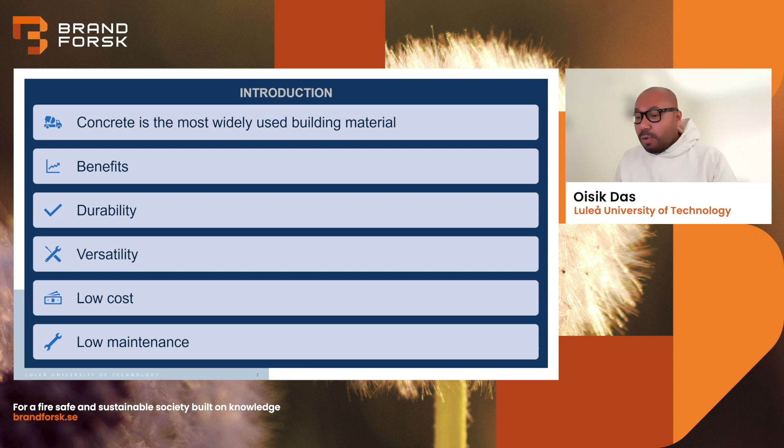So, firstly, concrete. It's one of the most widely used building materials in the whole world. It has many benefits. It's durable, it's quite versatile, it's quite cheap, and it also has low maintenance. So there are a lot of benefits to using concrete, but there are also problems, and these problems are getting bigger and bigger the more we are striving towards sustainable development.

So one of the problems is that it has detrimental effect when it is subjected to fire. It loses strength, and it can also spall. On the other hand, the cement in concrete has very high carbon footprint, and the production of cement has a lot of environmental problems and causes climate change. So these are the two big problems with concrete and cement.

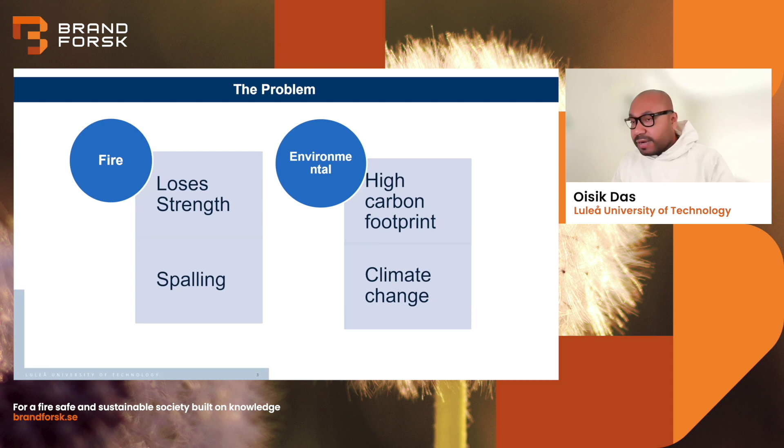So what is the solution we can use? We can use biochar in concrete. So what is biochar? It's the solid product of pyrolysis. Pyro means fire, lysis is to break. So when you heat any organic material or biomass in absence of oxygen at high temperatures, so more than 350 to 950 degrees centigrade, you get a carbonaceous material called biochar.

But why use biochar in concrete? Well, we know that 8% of global emissions caused by humans come from the cement industry. That's quite a lot. And in Sweden, where we are, every person produces about 460 kilograms of food waste. So if we can somehow replace cement with biochar, we can reduce these global emissions, the carbon dioxide emissions.

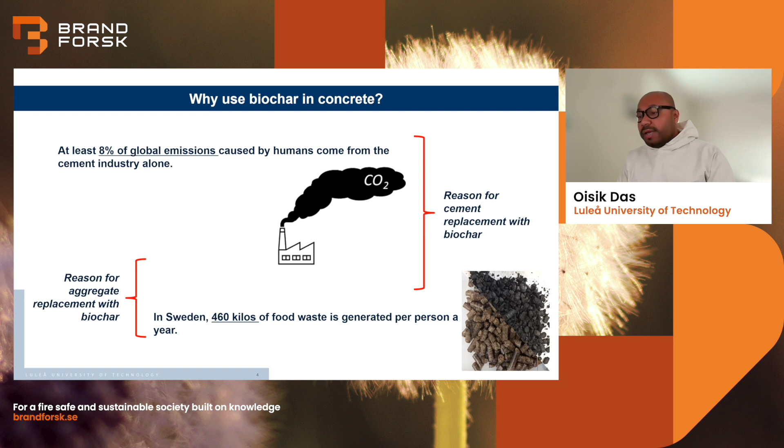And also, if we can convert food waste into biochar, then we are valorizing waste, reducing food waste, and it's more efficient waste management. So how are we using biochar in concrete? By replacement of cement, we can make it more non-polluting and reduce the carbon footprint. And by replacing aggregate, we can upscale or valorize food waste.

So from pyrolysis of biomass waste, we are making the biochar. Here we are using two types of biochar: a fine biochar, small particles, and a coarse biochar, bigger particles. The fine biochar is used to replace cement at 10, 15, and 20 weight percent of the cement. And the coarse particles of biochar are used to replace the fine aggregates at the same weight percentage of the fine aggregate. So the idea was to see if the porous structure of biochar can help water vapor to escape when concrete is exposed to fire.

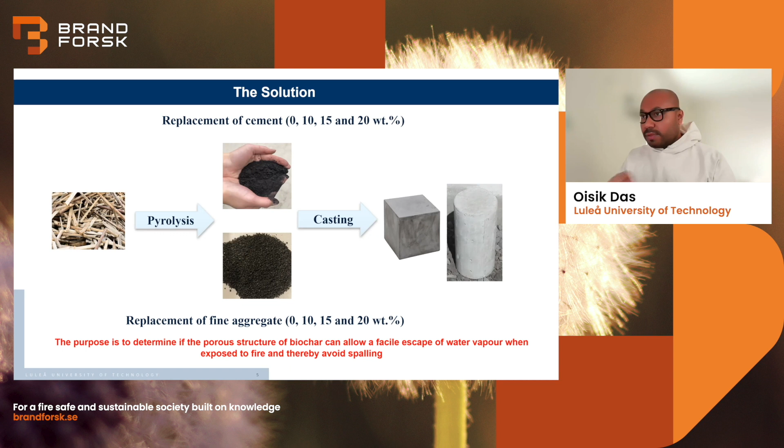So before we start adding biochar to concrete, we have to understand what the properties of biochar are and how these properties will affect the concrete. The first thing we need to understand is the density. We have calculated the biochar's true density or bulk density using an instrument called a pycnometer. Usually the density ranges between 1.5 to 2 grams per centimeter cube.

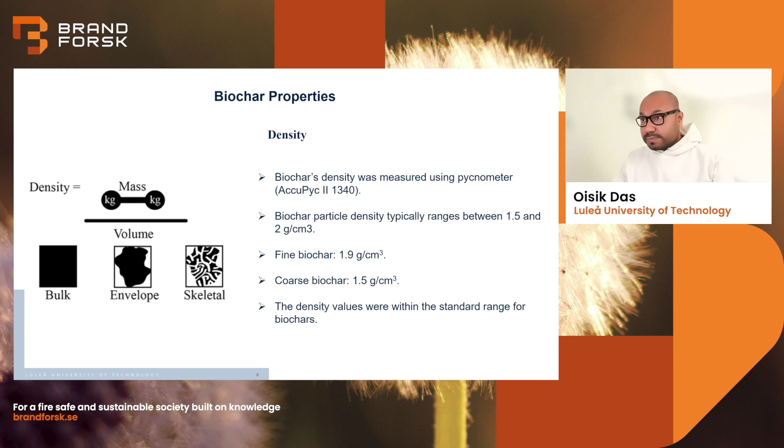Then the particle size distribution: we have used two different methods to determine the particle size distribution of this biochar. The first one is the laser diffraction method. It measures the angular variation in light intensity as a laser beam passes through dispersed biochar samples. And we have also used a software called ImageJ to analyze the photographic images to find out the particle size distribution.

So from the laser diffraction method, we used the fine biochar, and we found out, in graph A, that the particle size ranges from 100 micron to 400 micron. The two dominant particle sizes are 100 micron and 400 micron. And for the coarse biochar, which was made from olive pits, the particle size was estimated using ImageJ software, and it's about 3 millimeters in size, as given in figure B.

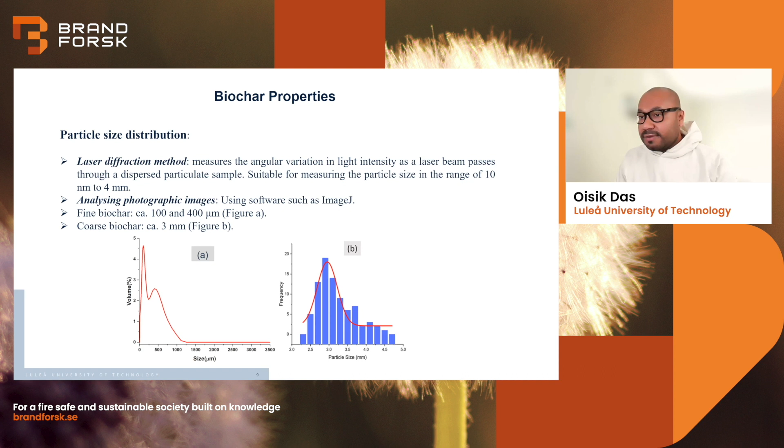Then the water absorption, because when we're adding biochar to concrete, we need water to mix concrete. So we need to understand, when we're adding a new thing in concrete, how much water the new thing will absorb. So we need to find out the water absorption of biochar, and it was done by a tea bag method. It is exactly what it sounds. So we filled up biochar in a tea bag, and then we put it in water, and we measured the weight change at regular time intervals.

Then a very interesting technique. If I ask you, hey, this is a block of concrete or block of wood, can you tell me the mechanical properties? You can easily use an Instron or 3-point bending test to find out their tensile properties, flexural properties. But biochar is a tiny particle. You cannot put it in an Instron and stretch it, or put it in a 3-point bending test to find out its flexural properties. We need a new type of instrument to find out the mechanical properties of tiny particles, and that instrument is called nanoindentation.

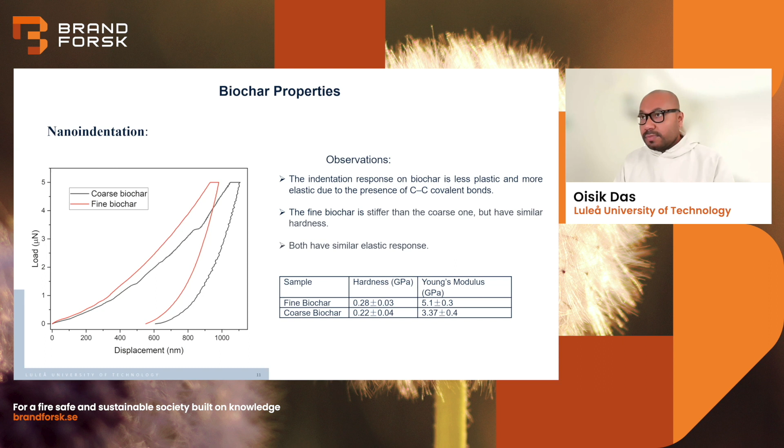Then this is where the fire testing comes. Before we even test the concrete in fire, we have to understand how biochar reacts under fire. So we have used a cone calorimeter. The principle of the cone calorimeter is that almost any material in the whole world, when it burns and consumes 1 kilogram of oxygen, releases about 13 megajoules of energy. And if we can know or calculate the flow rate of oxygen, we can calculate the energy released. And from that, we can get a host of reaction-to-fire information in the cone calorimeter.

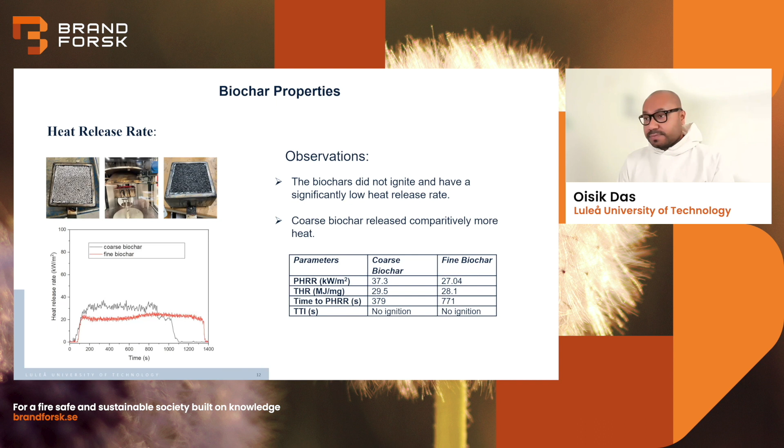Now, my colleague will take over, and she will talk about how we added this biochar in concrete, how we tested the concrete, and what are their fire and mechanical properties after biochar was added to concrete. Rhoda, the floor is yours.

Yes, sure. Thank you. So the recipe for the concrete we prepared for this project is shown on this slide. Two different types of concrete were prepared. The first one is the aggregate replacement concrete, where 10, 15, and 20% of the fine aggregates, which were between the sizes of 0 and 8 millimeters, were replaced with biochar, which had an average size of 2.95 millimeters. And for the cement replacement, 10, 15, and 20% of the cement were replaced with fine biochar, which had a particle size of between 100 and 400 micrometers.

So in all, we prepared 7 batches, including the control sample, and about 30 liters of each batch was prepared. After the concrete preparation, we molded them in cubic and cylindrical molds, and they were cured for 28 days, after which we placed them in a humidity chamber that was set to 23 degrees Celsius and 50% relative humidity.

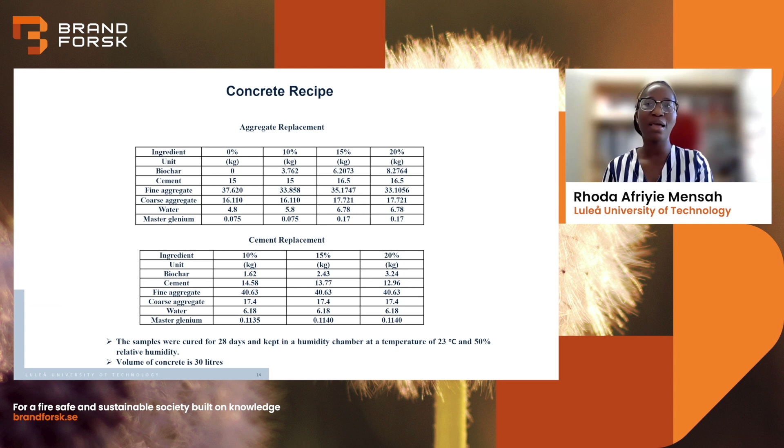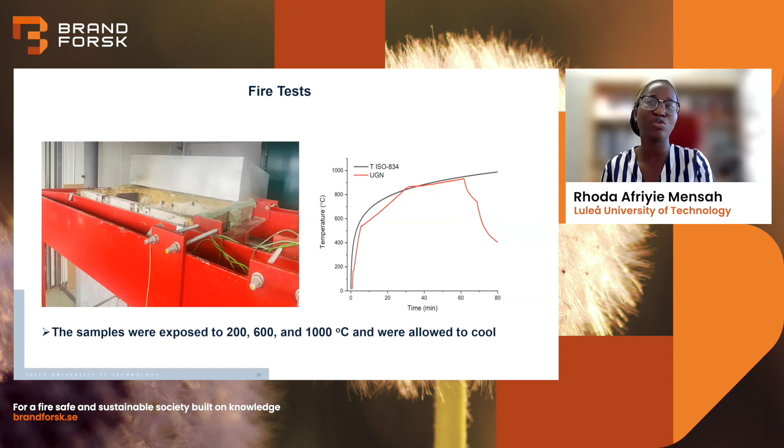So after curing, we did a fire test. And in this fire test, we used a fire furnace at the Fire Engineering Protection Lab in LTU. And this particular furnace goes according to the fire curve, the ISO 834 curve, as shown in the figure on the right. And for this experiment, we arranged the samples inside the oven, and we fitted the lid of the oven to prevent any heat losses. And the samples were exposed to 200, 600, and 1,000 degrees Celsius. After that, we allowed it to cool before we carried on with the other tests.

After the fire test, we made some observations. At 200 degrees Celsius, no visible changes were seen, but at 600 and at 1,000 degrees Celsius, we noticed significant thermal cracking and color changes. And the thermal cracking could be a result of the water evaporation, which caused the cement to lose its binding ability. And the color change was due to the iron in the aggregates oxidizing, which changed the color from grayish to brownish.

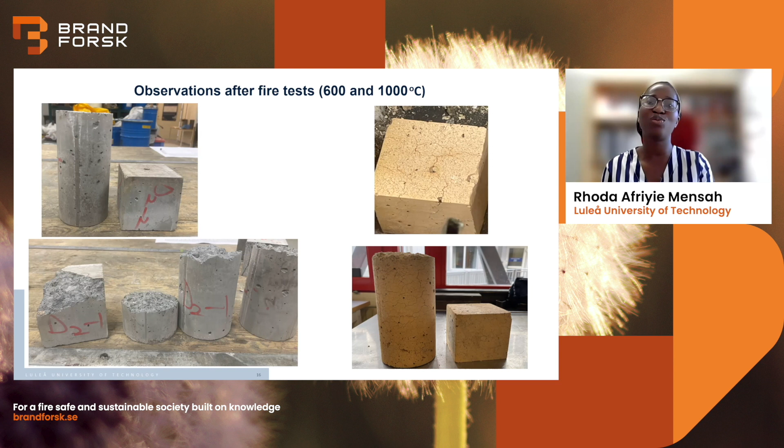So after the fire test, we performed mechanical and tensile splitting tests for both the cubic and the cylindrical samples. And on this slide, we have the results for the cement replacement samples. We saw that reducing the quantity of cement and increasing the biochar content decreased the compressive strength and also made the concrete stiffer. The notable observations we made were that at 200 degrees Celsius, we saw a significant increase in the compressive strength and also the modulus of elasticity.

And this was because the heat energy that was provided during the heating accelerated the hydration process, so that increased the compressive strength. And at 600 degrees, we didn't see a significant decrease in the strength, but at 1,000 degrees, there was a drastic decrease, and literally the samples crumbled. It experienced thermal cracking and it crumbled.

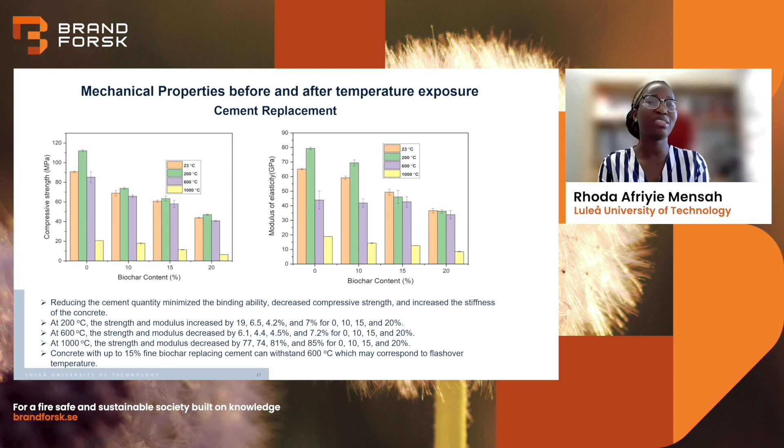But if we look at the two figures, we see that with 15% fine biochar in the concrete, the results were not statistically different from the 10% and 0%. And even at 600 degrees Celsius, there's not a significant decrease in the strength. So we can conclude from this slide that even adding up to 15% fine biochar in cement, it can withstand 600 degrees Celsius, which also corresponds to flashover temperature in building fires or structural fires.

We also did the tensile splitting test for the cement replacement samples in the cylinders, and we noticed a particular trend where the strength decreased with increasing biochar content. And for this particular result, we don't have any results for 1,000 degrees Celsius because the concrete samples, the cylinders, crumbled when we tried to do the tensile splitting test. So if you look at the figure on the right, we see that it just broke into two pieces when we decided to do the test.

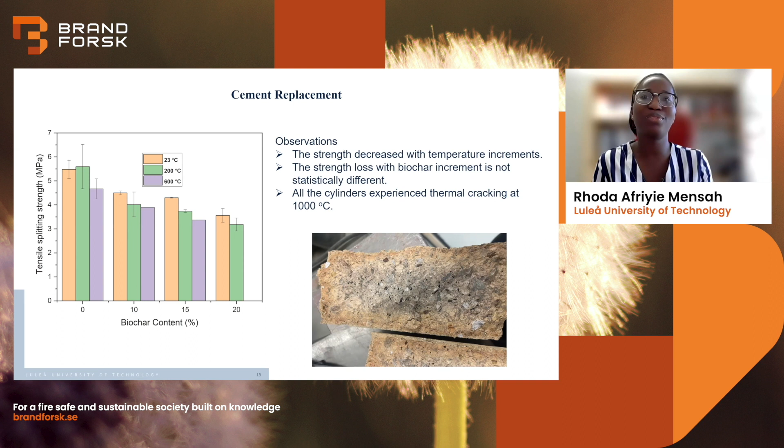So we also have results for the aggregate replacement samples. It has a similar trend as the cement replacement samples, but we saw that the overall reduction in strength in the cement replacement samples was more than that of the aggregate replacement samples. In the aggregate, the cement quantity was constant and we didn't reduce it. But in the cement replacements, the cement was reduced, so that reduced the strength significantly.

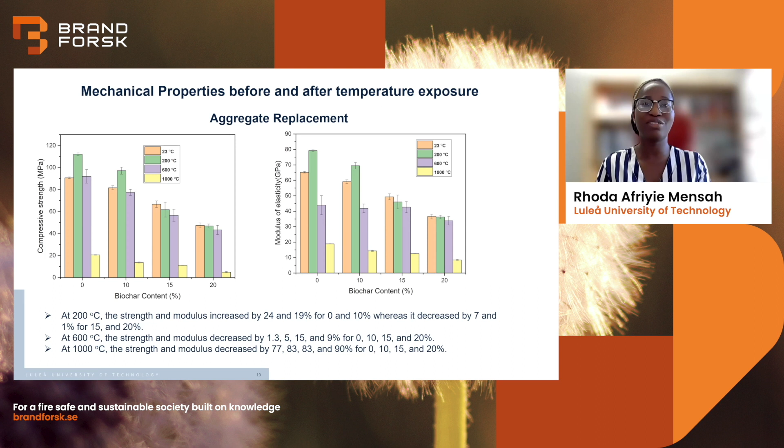We realized that at 200 degrees Celsius, the strength and modulus increased for the 0 and 10%, but for 15 and 20%, there was a decrease in strength. And at 600 degrees Celsius, the reduction in strength was similar to that of cement replacement. And at 1,000 degrees Celsius, we also saw a drastic decrease in strength.

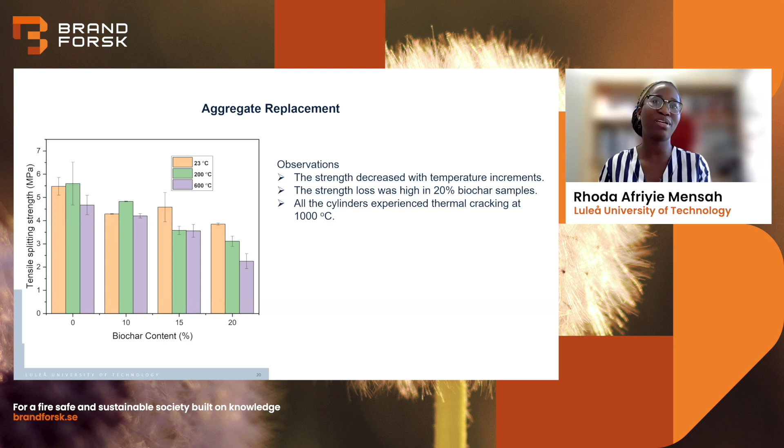We also did a time-dependent fire test. With this test, we had the intention of exposing the samples to the standard fire curve, that is the ISO 834 curve, and then we wanted to observe the changes in the concrete after 30, 60, and 90 minutes. For this test, we used the 15% cement replacement samples because the difference in the strength and modulus were similar to that of the 0 and 10%.

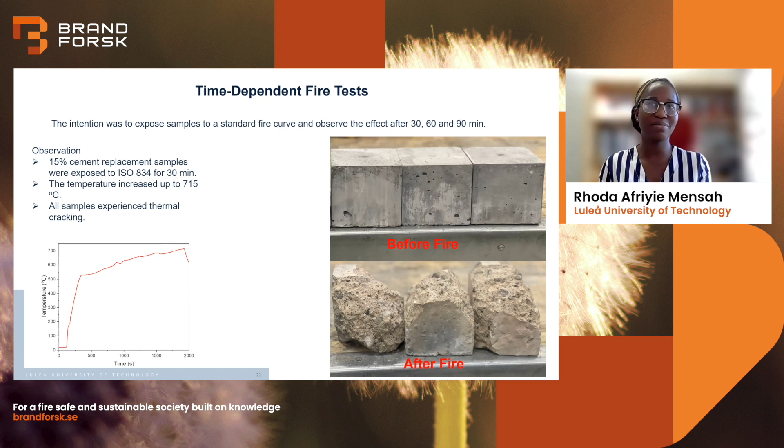So Oisik will take this part.

So after all the macroscopic tests of the concrete, we need to see what is actually going on inside the concrete. For that, we did microscopy, in particular scanning electron microscopy. Let's look at the microstructure of concrete with biochar. On this first slide, we are looking at three different samples: 0%, the 15% cement replacement, and 15% aggregate replacement.

We have chosen 15% because, like Rhoda said previously, the 15% biochar concrete had similar mechanical properties. This is the highest amount of biochar we can add in concrete and still have the same mechanical properties. So it's the best according to us, because the more biochar we can add in concrete, the more sustainable it becomes without losing mechanical properties. That's why we have chosen 15% as our optimum replacement or loading amount of biochar.

So if you look at the standard concrete without any biochar, then concrete where the cement was replaced with 15% biochar and where the aggregate was replaced with 15% biochar, we see that the morphology looks quite similar in all three samples. In the aggregate replaced sample, we see a big biochar particle pointed out by an arrow, the porous structure, and then we have the cement phase and the biochar particle.

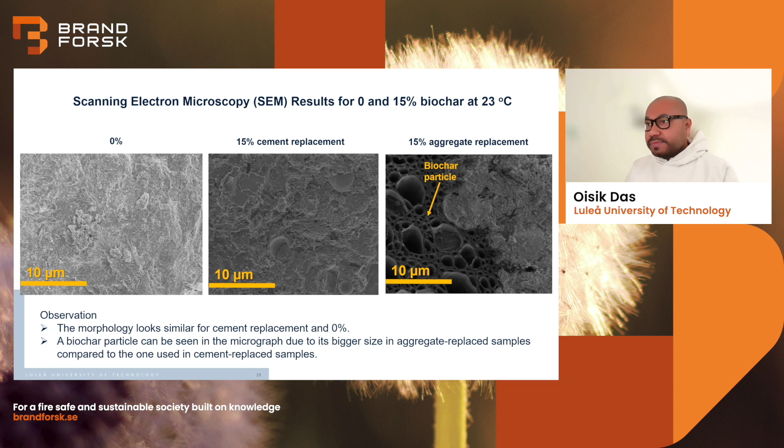And these are the same samples, which were exposed to 200 degrees centigrade. We see that at 200, no significant changes in the morphology occur from room temperature, 23 degrees centigrade. Again, for the 15% aggregate replacement, we see a biochar particle because the biochar used to replace aggregate was way bigger compared to the fine biochar.

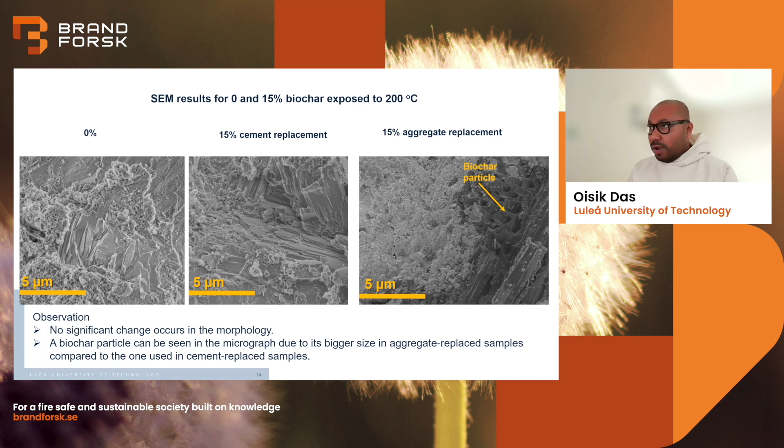Now we see what happens to the concrete samples when they were exposed to 600 degrees centigrade. We see a few changes. The first change is that calcium hydroxide crystals, which were present at lower temperature, are less visible in all three samples. But still, the morphology and microstructure of the standard concrete, the cement replaced sample, and the aggregate replaced sample look quite similar.

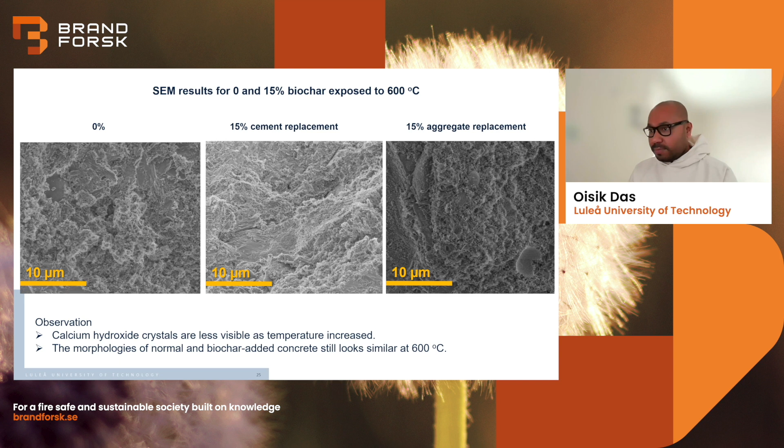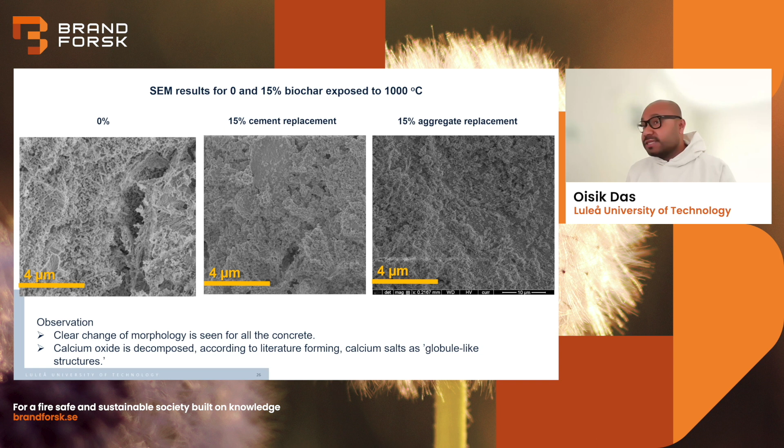And this is where things go a little crazy. These are the samples exposed to 1000 degrees centigrade in the standard fire curve ISO 834. We see a clear change in morphology. We see globules. Basically, the calcium oxide is thermally decomposed and creates calcium salts, which are those globule-like structures. From our literature study, we saw that these globule-like structures are basically calcium salts, which form due to the decomposition of calcium oxide.

Now, Rhoda will conclude and take it home.

All right. So we made a summary of the fire behavior of biochar concrete and compared it to the standard concrete using the respective temperatures we used in this project. So at 200 degrees Celsius, which represents a small fire, we saw that none of the samples experienced thermal cracking. And at 600 degrees Celsius, which represents flashover fire in structural fires, we saw that all the cement replacement samples for 10, 15, and 20% experienced thermal cracking, but the aggregate replacement and the standard concrete did not experience any cracking. But when we consider the large fire or the fully developed fire at 1,000 degrees Celsius, all the samples

experienced thermal cracking. So from this, we can make conclusions that up to 20% aggregates can be replaced with biochar, and we can still have safe structures after fire exposure until 600 degrees Celsius. And also, up to 20% of cement can be replaced with biochar, and we can still have safe structures until 200 degrees Celsius. So these 2 points are the main conclusions we made from our project.